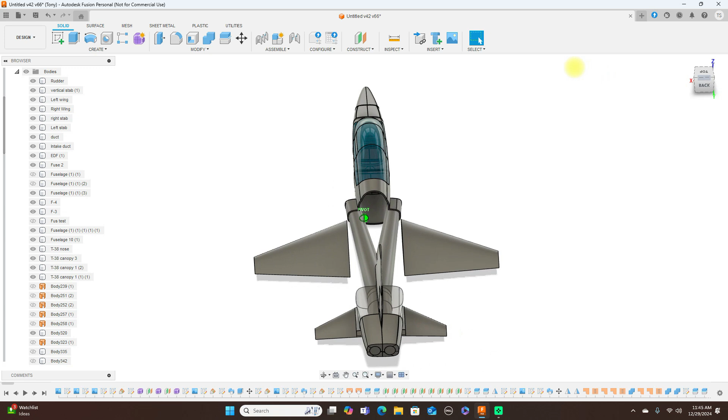I got a question about doing some ducting from one of my subscribers, so what I'm going to do is show you a couple of ways how to do ducting like this in this T-38 here. This is just one of the ways I did this.

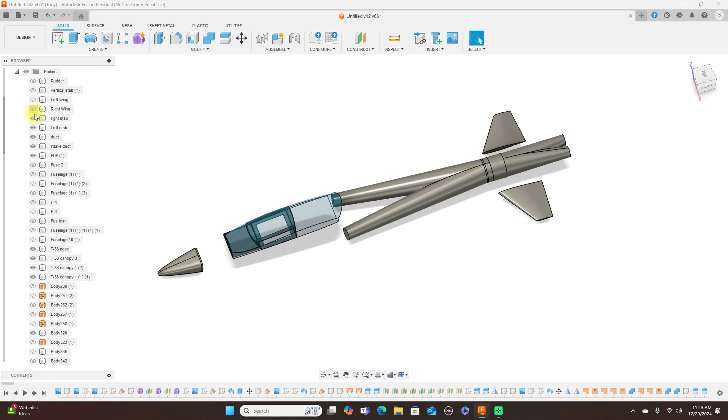Let's turn off some of this stuff so we can have a better look at it. Okay, we can turn off the wings too, all this other stuff, we don't need to be looking at that. Let's see here, the canopy, the nose. Okay, here we have just the ducts, the ducting, and the fan here. We don't need that either.

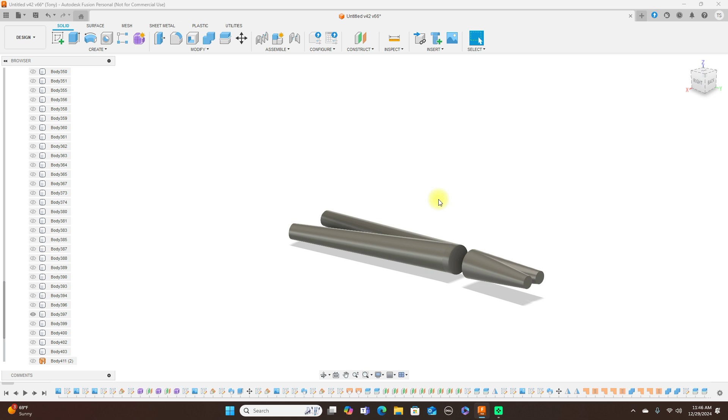Now to do this, to get these like this, so you have ducting like this, and we have all this here. I'm going to show you how to do this. This is not very difficult to do, but I'll show you how to do it.

Let's start a new project here. Now how I did that...

Let's just do a make-believe fuselage here. So let's do a little design. And another line.

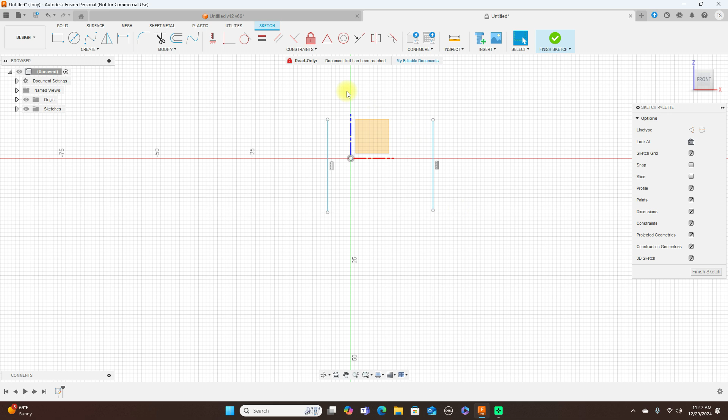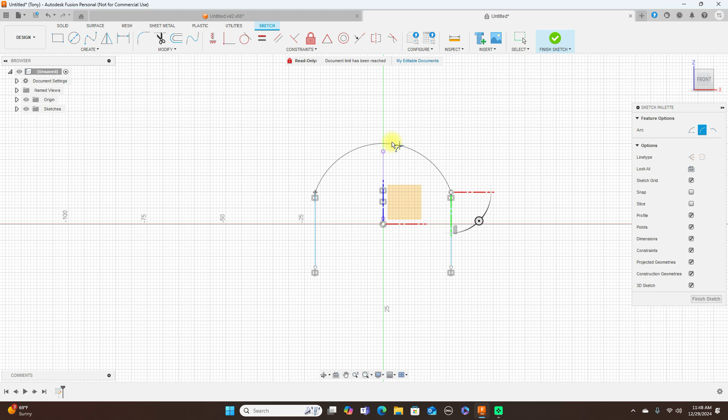Go ahead and delete this one here, and then mirror this line here. I'm going to use a 3-point arc on the top, and a 3-point arc on the bottom.

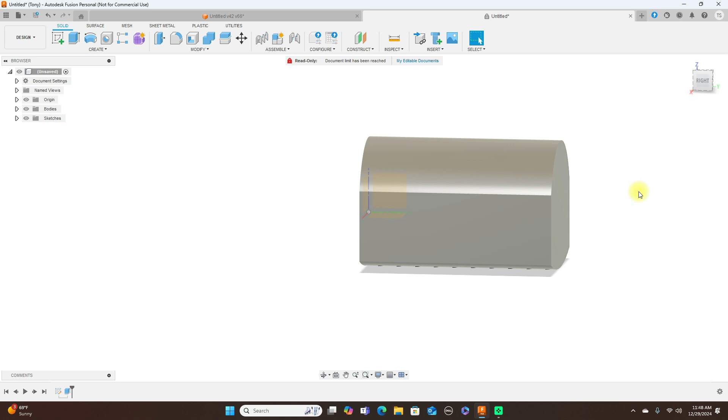Finish sketch here, then I'm going to extrude this. All right, there's our makeshift fuselage. Let's go ahead and make it a little longer though, so just come down here and edit this, stretch this out further, there, and click OK.

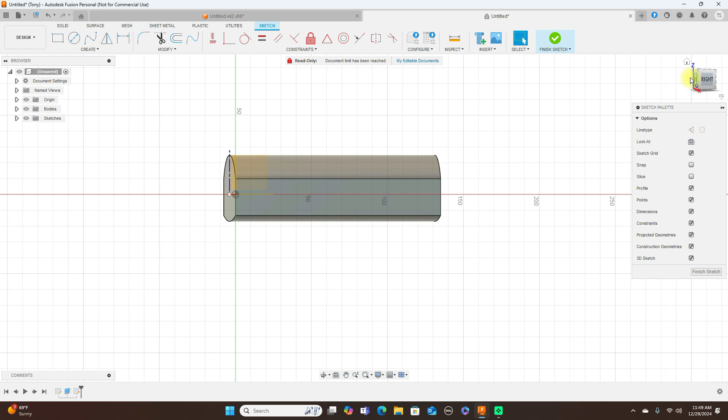And what I'm going to do here is split this in half, draw a line here. Well, before that, before I split that in half, let's say if we have an EDF fan unit that I want to put inside of here.

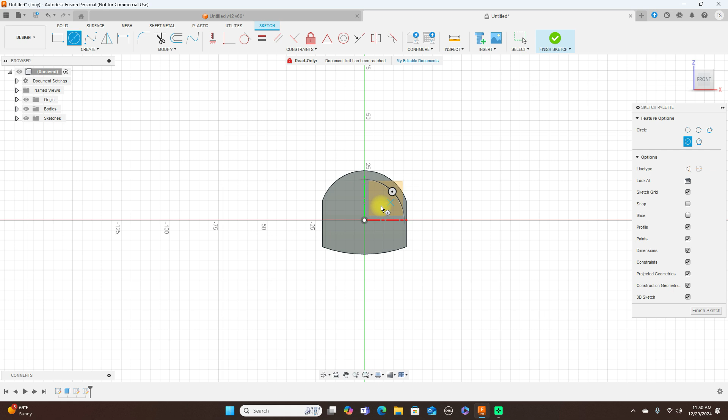So I'll create a sketch on this plane here, use a circle, and move this down a little like that. Unlock that so I can move it again if I want to. Now we have that there.

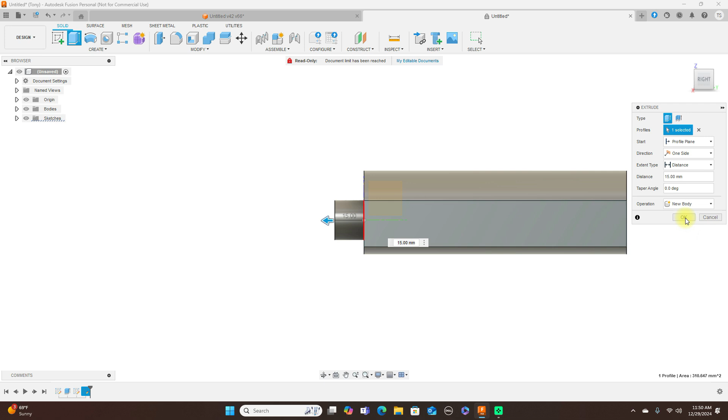What I'm going to do is finish sketch here, extrude this forward a little, let's say whatever size your EDF unit is, the shroud on the outside, and this is a new body. Click OK, now I'm going to move this back.

Come over here to the bodies, and this here. Well, first I'm going to take this one here and the opacity level, drop that down to 60. And then I'm going to move this back.

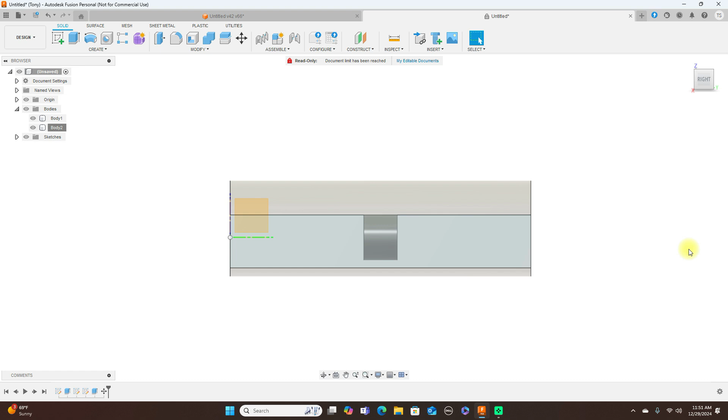Now, somebody even asked a question about whether they should design the duct first and then design the airplane, or vice versa. That's up to you how you want to do that. If you want to build the plane around the EDF, that's fine too - model your EDF unit in there first, then go ahead and model the airplane around it. But what I do, I like to model the airplane first, and while I'm doing that, I have the dimensions of the EDF unit that I'll be using, and I use those dimensions when modeling to make sure the EDF fits inside the jet itself.

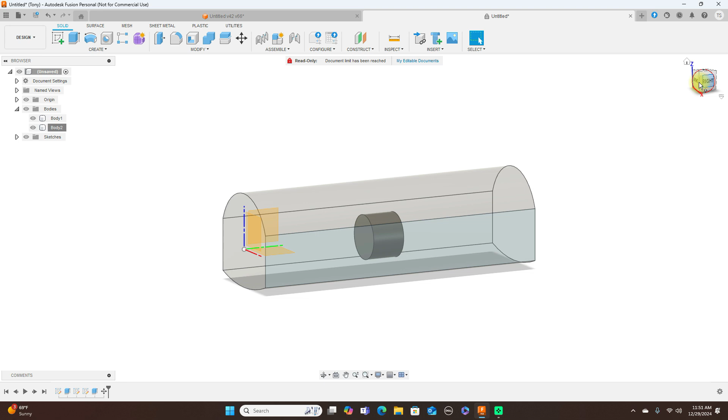So anyway, we have this here, now we have the EDF unit in here, and we want the intake ducting and exhaust ducting on here. Now what I'm going to do is turn this off here. I can leave it on, no biggie.

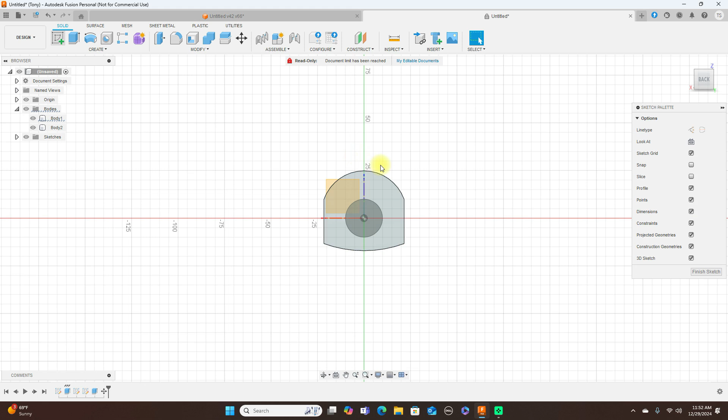And the split ducting, what I'm going to do here on this plane, create a sketch. Let's say you're using a 90 millimeter EDF fan unit and you want the exhaust - now you can keep it at 90 millimeter, but for thrust and everything, you can drop it down somewhere like 10%.

So 10% of 90 would be 9, and 90 minus 9 would be 81. So the back of this duct opening, I would have it between 81 and 83. If you have a split ducting at 81, let's just make it an even number - let's say 82. So if you want bifurcated ducting in the back, each one of the outlets should be 41 millimeters diameter, since it's 90. So what we do, I'm going to take this.

Now, this is not exact, because I didn't draw this to scale when I started, but just to let you know again, if you're using a 90 millimeter EDF fan, or let's say a 100 millimeter fan, then the ducting in the back, if bifurcated, 10% of that 100 would be 90, so each of the exhausts of the bifurcated ducting should be 45. But anyway, this is just showing you guys how to do this.

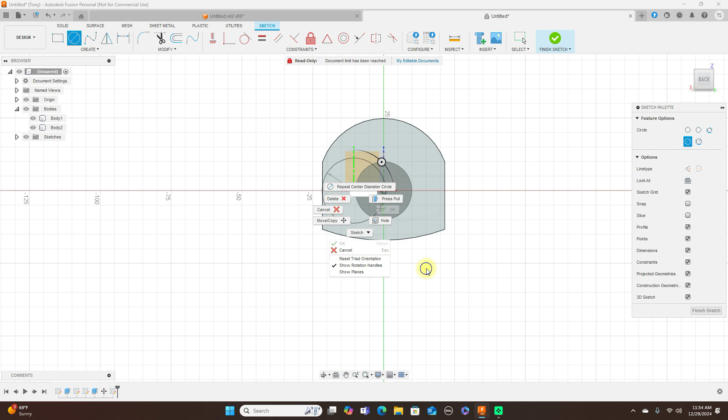Oops, it's too big. I'll cancel this. Do this again.

Okay, now I have that circle there. Just go ahead and move it a little closer, it doesn't have to be that far out there.

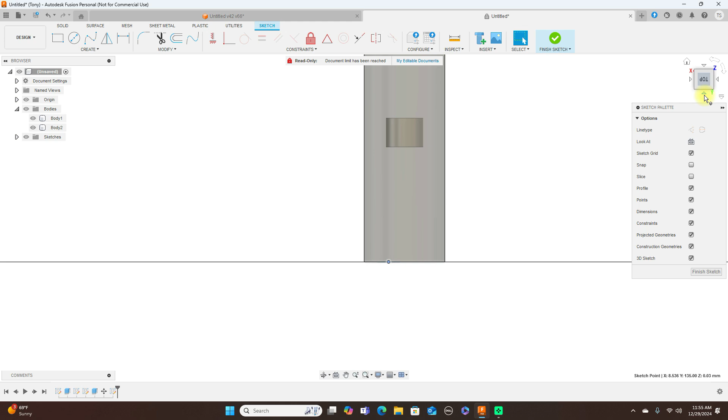Okay, now I can turn this body off here. Go ahead and finish sketch. Now what we're going to do is use a loft on this outer here, or make sure this is zeroed out before you start.

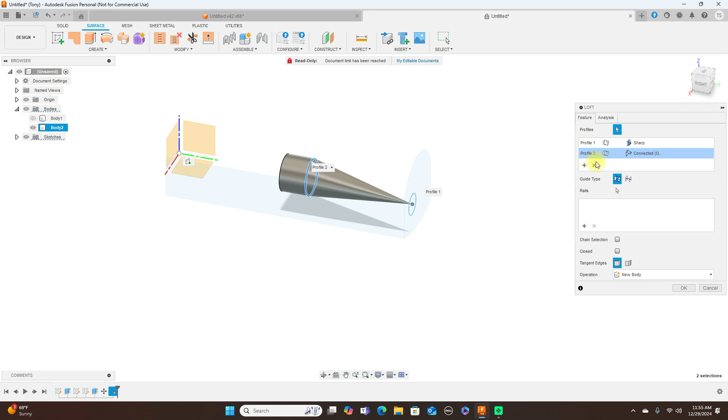And new body, and click OK. And you have that there. But what I'm going to do here is go back and delete this.

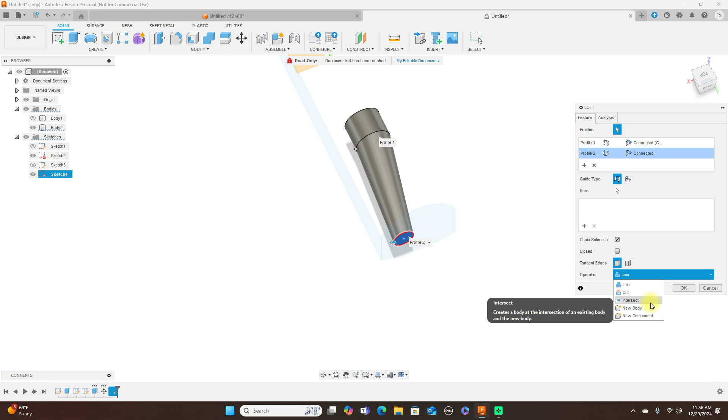And I'm going to use a solid loft. And make this a new body. Now it depends, it's up to you which one you want to use, but I want to use a solid for splitting purposes for when I do the other one of these.

Now we have that one there, and now what I'm going to do is use a mirror. Mirror this, and this is the plane. And we want to join this. I'll go ahead and join this. And click OK. And now you have your exhaust duct there.

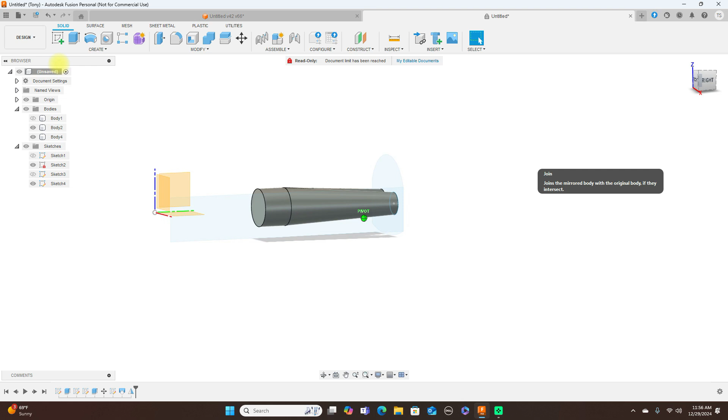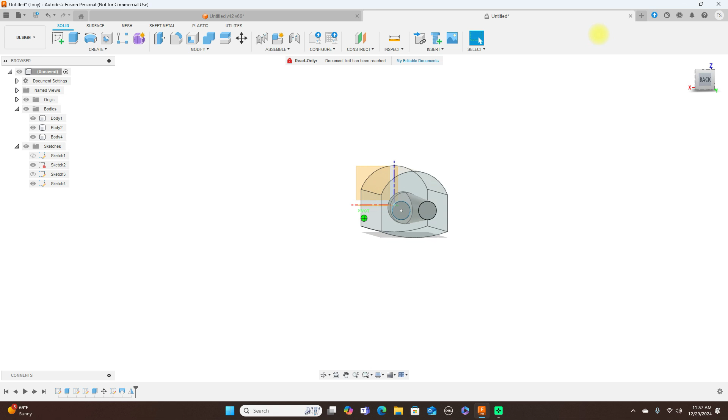Okay, and we turn this body back on here. And now we have our internal ducting there. And the front is done the same way.

So, say, create a sketch on this plane here. Circle. And whatever your intake is here - so if you have a 90 millimeter EDF unit and you have two intakes coming in, the ducting should be a minimum of each one of these, a minimum of 45 millimeters. Like I said, if that intake is 90 millimeter, the minimum intake on the EDF is 90 millimeter, or if it's 100 millimeter.

If it's 100 millimeter, then each one of these ducts up front should be minimum 50 millimeters for 100, and 45 for a 90 millimeter, and 40 for an 80 millimeter. That should be the minimum. But the more air that you can get in there, the better.

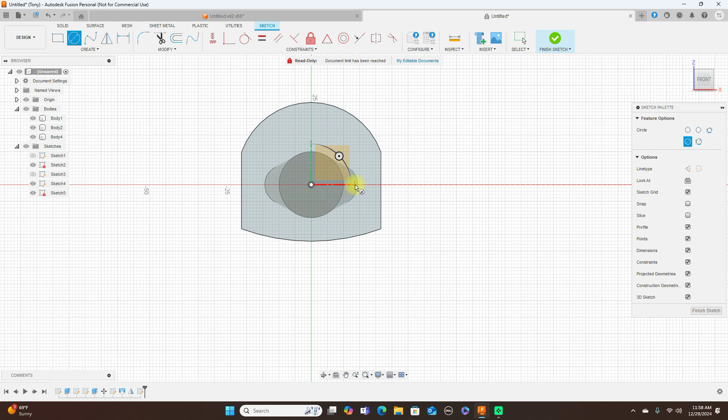And so let's just go ahead and put this over here. Like I said, this is not to scale as far as the diameter because I didn't start it like that. Okay, we can turn this body off.

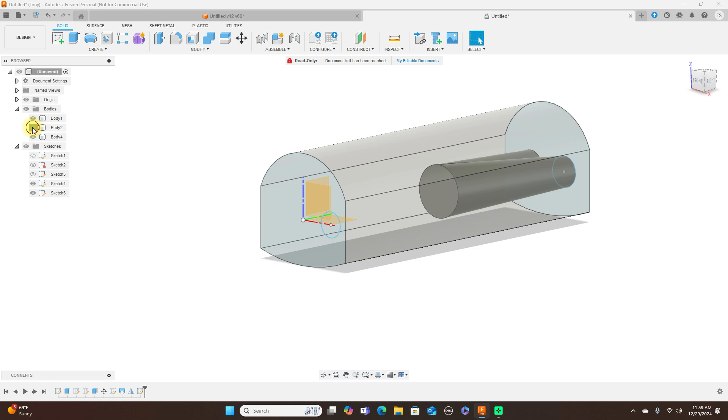Oops, go. That's that, that's that, and that's that. And again, we're going to loft. Oops, loft. Make sure this is zeroed out.

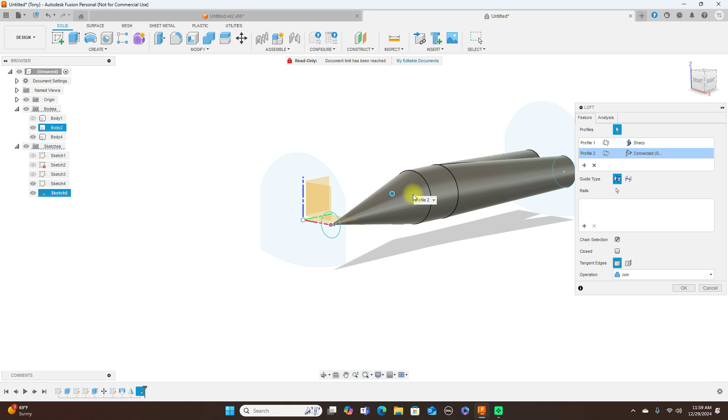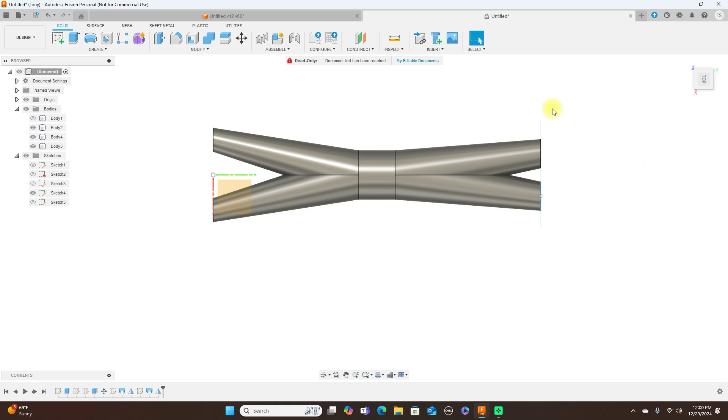And it did that point again, no worries. And make this a new body and click OK. And again, just mirror this. Like I said, this is just one way of doing this. And there you have your internal ducting for this.

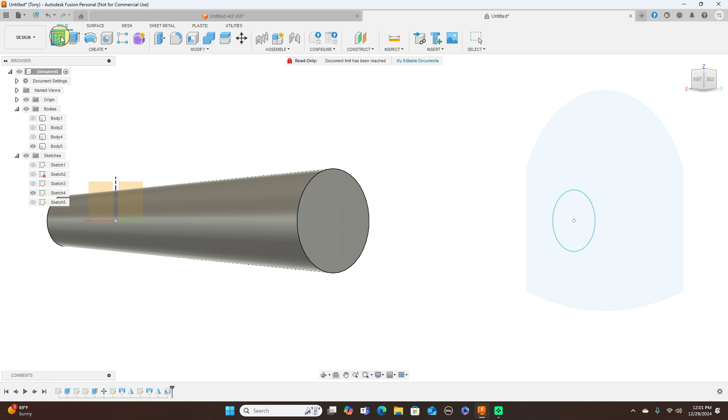And turn this off and turn this one off. And what I'm going to do now, create a sketch on this plane. Offset - and this offset is going to be whatever thickness you want your duct to be. And I'm just going to extrude this, cut.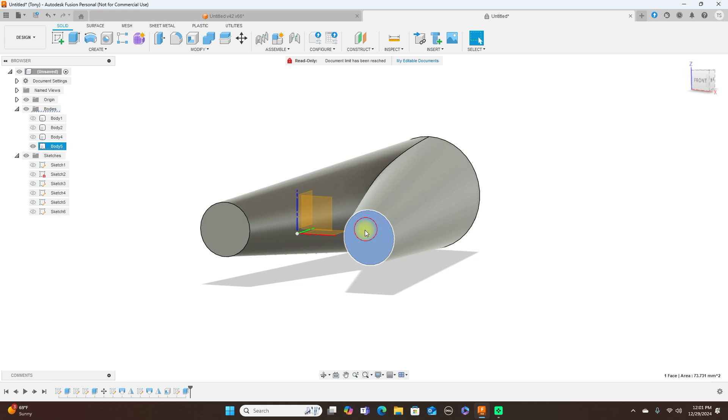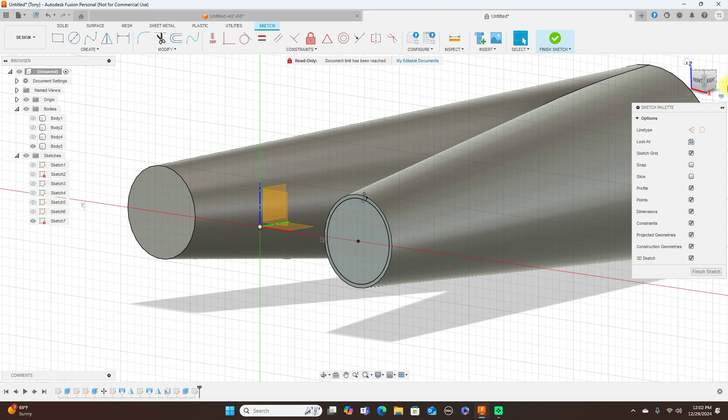Same with this. Create a sketch on this plane here. Do an offset, this. And it just mirrored that circle. Click OK. Finish sketch.

And we're going to extrude those two and bring that in. And we have our duct.

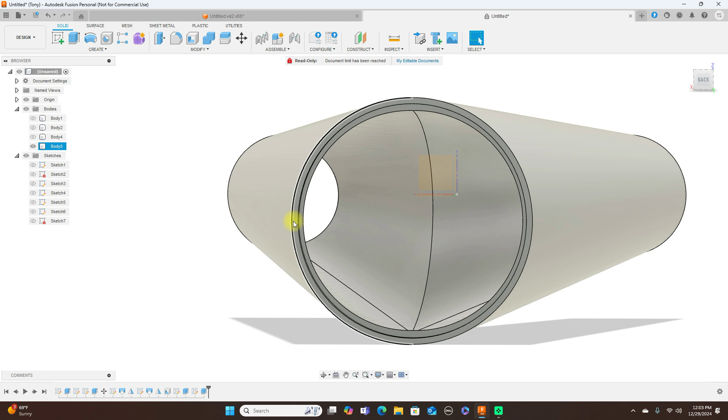Just make sure the circles that you sketch are from here to here, whatever thickness your ducting you want it to be - just move that into here when you sketch it. And the reason I did it this way, instead of using the surface loft, this loft, is it's less cutting. I can just combine the two like this, like I did.

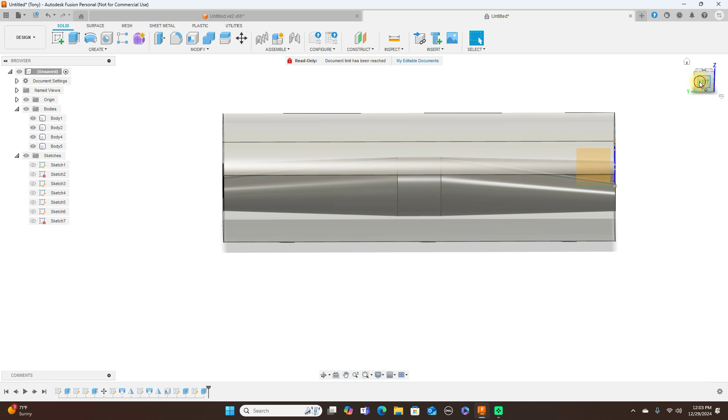So we have the back there. I turn this off, and turn this one off too.

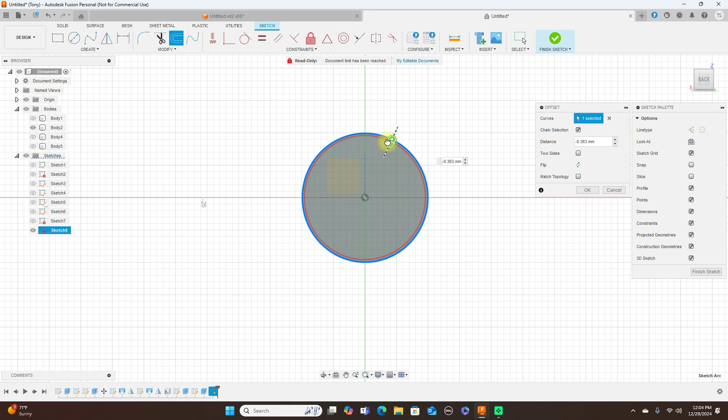And we can create a sketch on this plane here. Offset this. Extrude. And as you see, we have our ducting there.

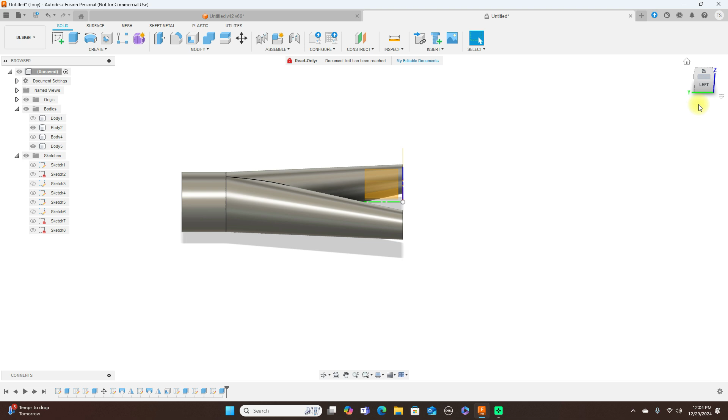Now this is just one way of doing this. Let's look at another way of doing this. If you're using Fusion to do this like I'm using right now, you can come up here to create form, and you can actually just use a cylinder.

And specify a center point - let's just say it's here. Then whatever length you want it needed to be. Add height faces.

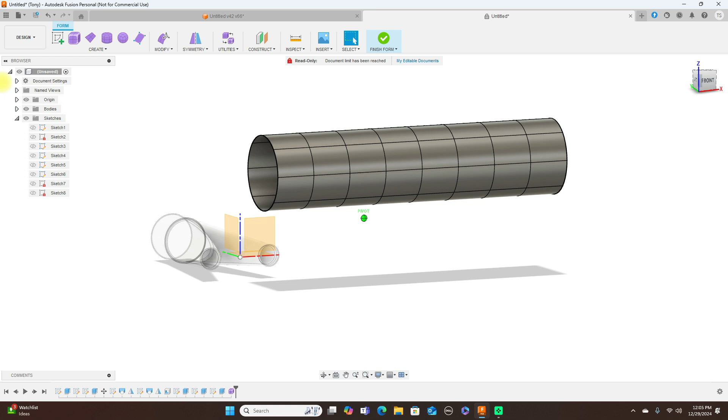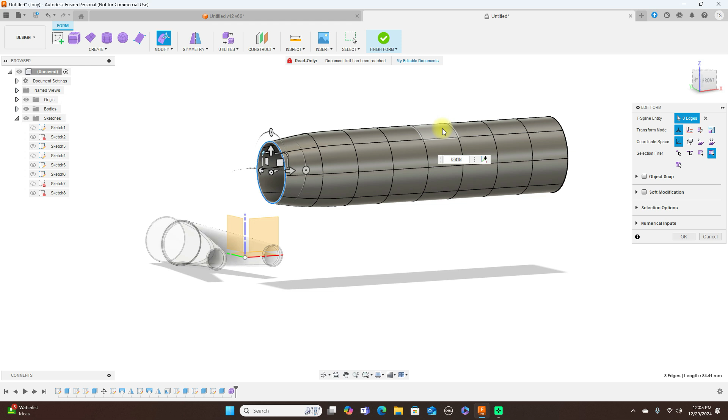Then you can edit all this stuff in here to get it to the size that you need it to be. So if we come out the front here, you take this and move this in, and everything. Again, if you need to move it to wherever, however you need it to be, then you can do that.

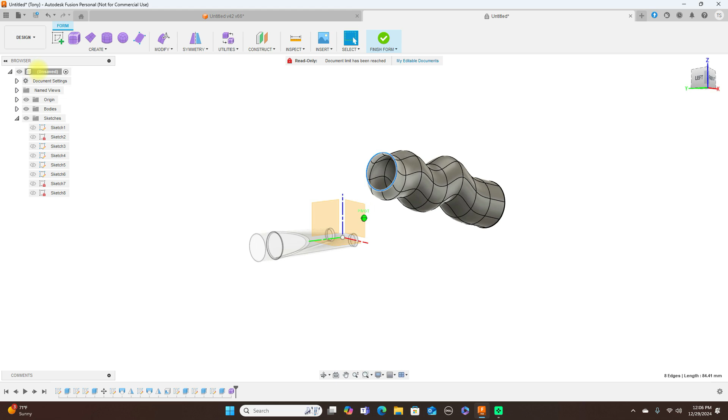So let's say this here, and you can stretch it around too and stuff. So again, that's just if you're using Fusion for this, then you can do that by using the form and make your duct like that.

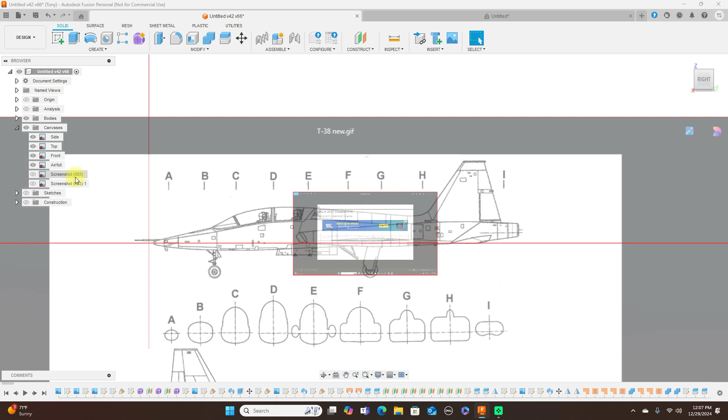And for surface modeling, turn this off too. Say like, let's see here, go back to this. Turn these off. And turn this little piece off here. Okay. Now turn the canvases on here. Turn the airfoil off here. Okay.

Now, to do the ducting for this is one way of doing this. I'll show you here. We're going to put an offset plane and move it back to wherever the ducting you want it to start at. I'm just going to put it right here for demonstration purposes, and click OK.

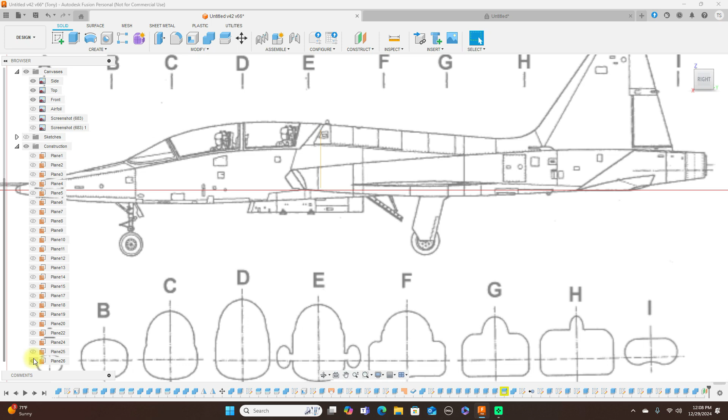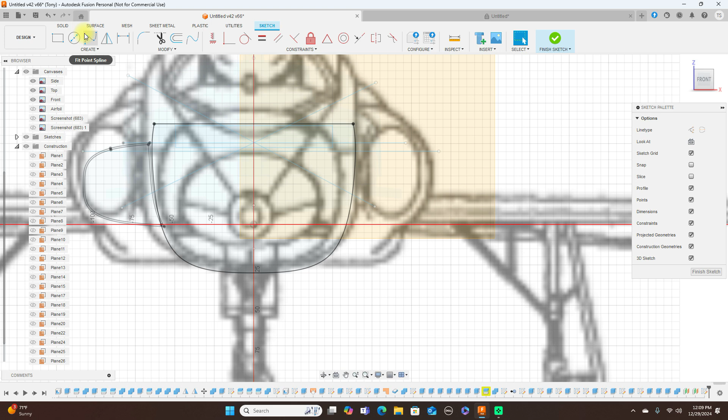Okay, and I'm going to put another plane to where the EDF is going to start. Let's say it's going to start right here. Okay, we have our two planes there. First, going to create a sketch on this plane here, and I'm going to use fit point spline.

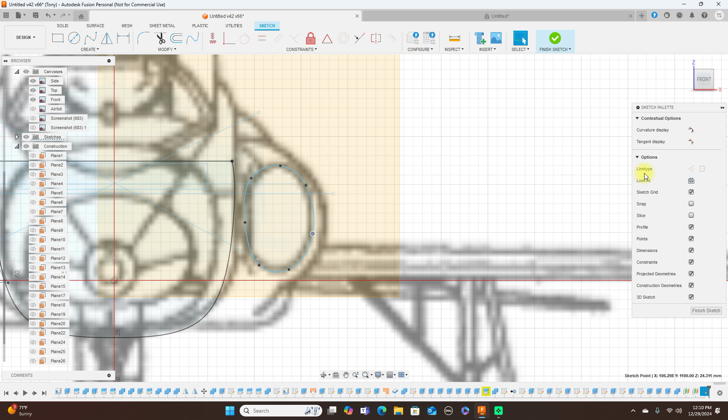Okay, whatever shape you want this to be, I'm just following this around here. And go ahead and finish sketch.

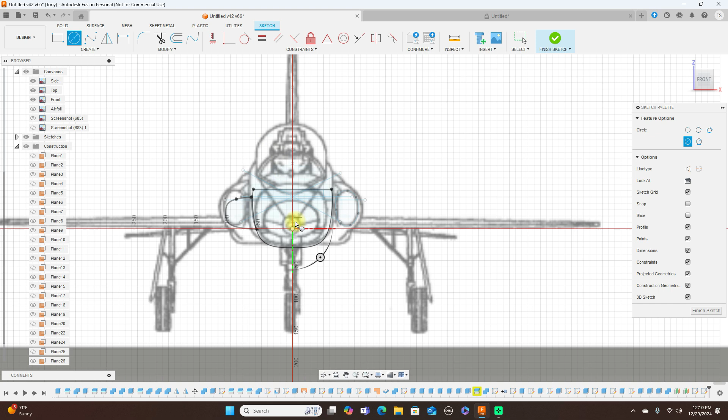Now, I'm going to create a sketch on this plane here, this one. And wherever I want my EDF in the center to be, so I want it here or somewhere. And I want the outside diameter to be 90 millimeters. And go ahead and finish sketch.

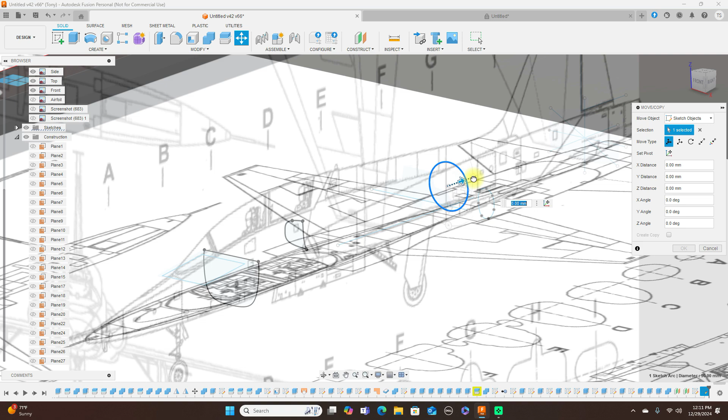Turn sketches back on. But let's see here, I want to move this back. I drew it on the same plane. And say about right there. Click OK.

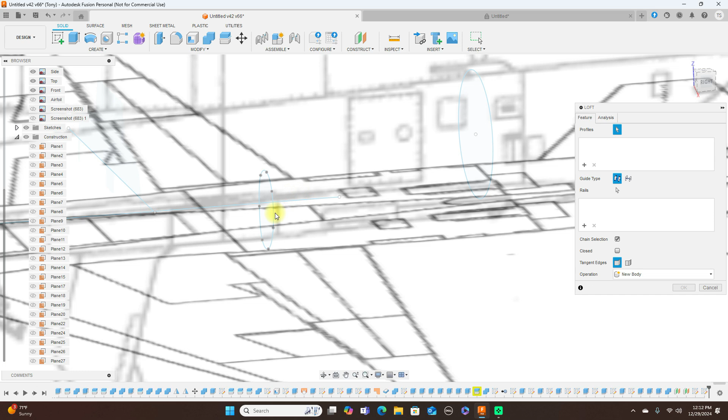And same thing, we come up here to loft. Loft this. Pick that point again. We have that. But I went to the wrong point here, sorry about that. Let's go ahead and go back.

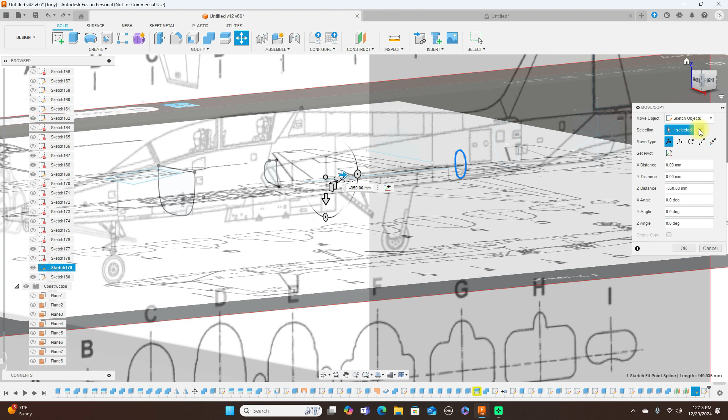And turn on that last sketch. Or I put that at the wrong place too, on the wrong plane. But no worries, so just move it. And move this up front here. I don't know why that won't move, but no worries, I'll just do that sketch again.

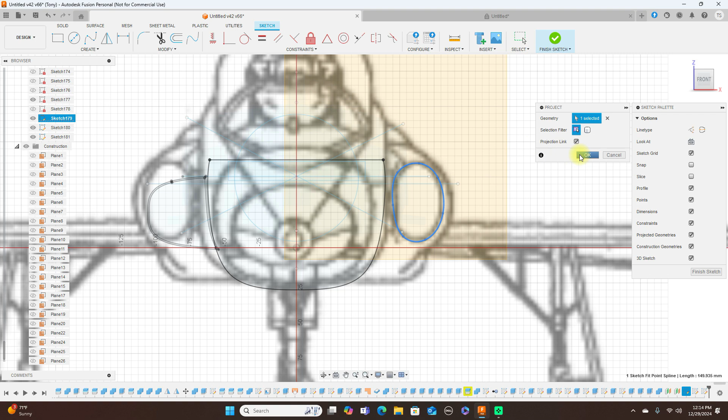So on this plane here, create a sketch. Well, actually, I don't have to cancel that. Hit project that onto it, and finish sketch. Now we have that up front, and we loft that again. And click OK.

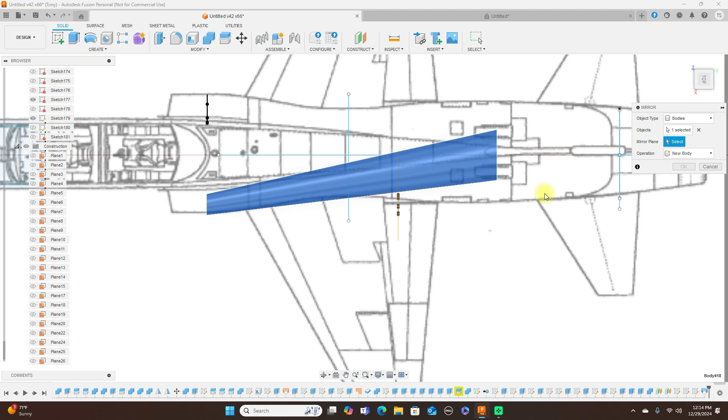Now we have that in there. Then we just mirror this. And there we have our duct. And the back one's done the exact same way.

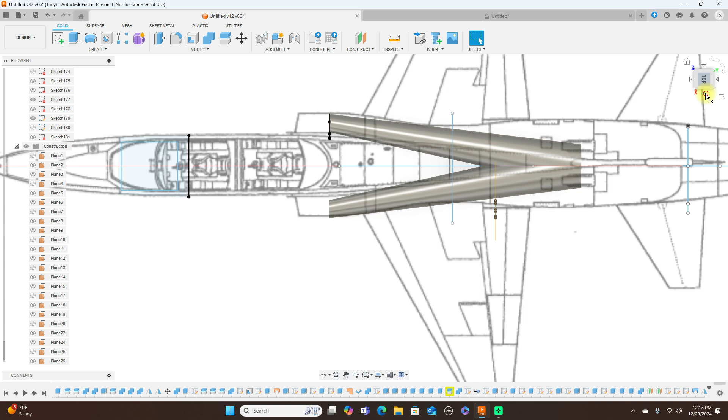Now, other ways of doing this, let's take a look. Go ahead and delete this, we don't need it. We have this here. And we can cut this duct out of this, or make this hollow and have the duct inside of it. So let's go ahead and do that.

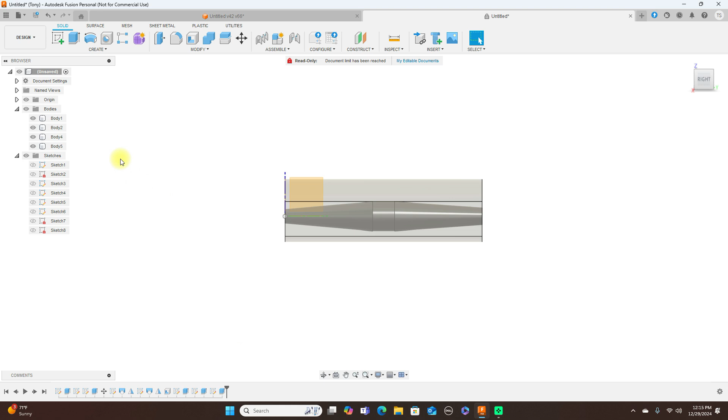So first, let's go ahead and just cut the ducting out of here. So this body here, and turn the opacity, I can leave it like it is. So we come up here to combine. This is a target body, and these are the tool bodies. And select Keep Tools, and click OK.

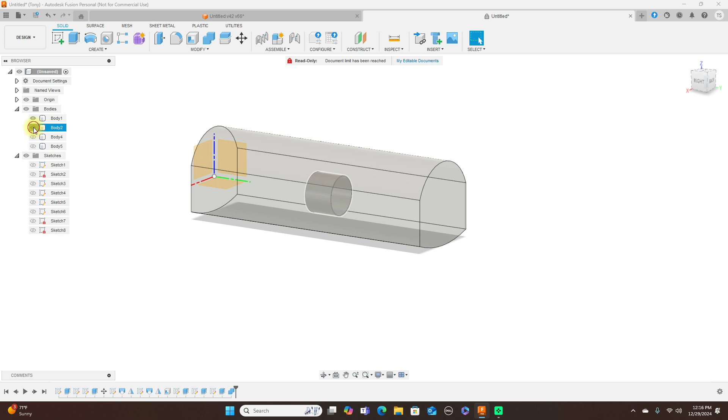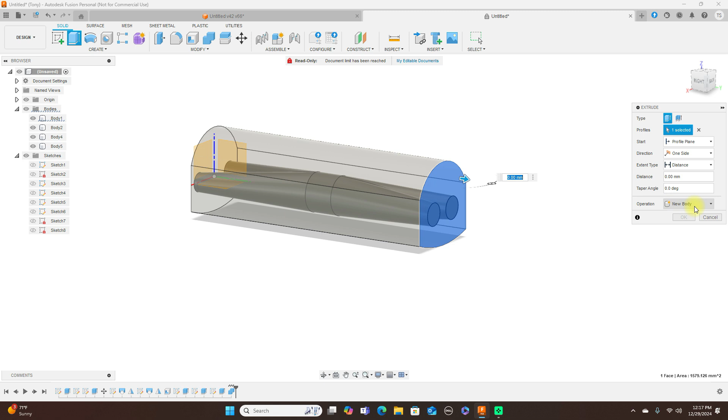Now turn off these ducting. Now, like I thought, it didn't go all the way through here on the ends, which is no problem. Let's cancel this and bring the opacity back up here. Show you what I exactly mean here. So if I turn all these off, then I come up here to inspect section analysis. This is not all the way through here, like I thought.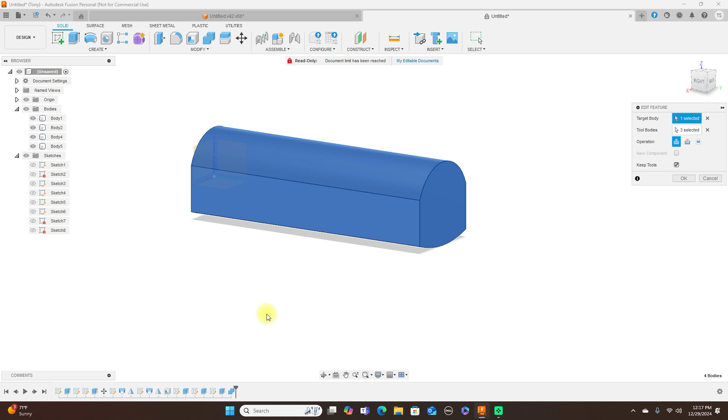So we turn these back on. And the reason that it didn't cut in there, you're probably wondering, is because, I'll show you here. Edit, see this right here? I had this to join, need to move this to cut. Okay.

Now turn off these, and now you can see that cut inside there. Inspect this, section analysis, and now you can see that cut in there.

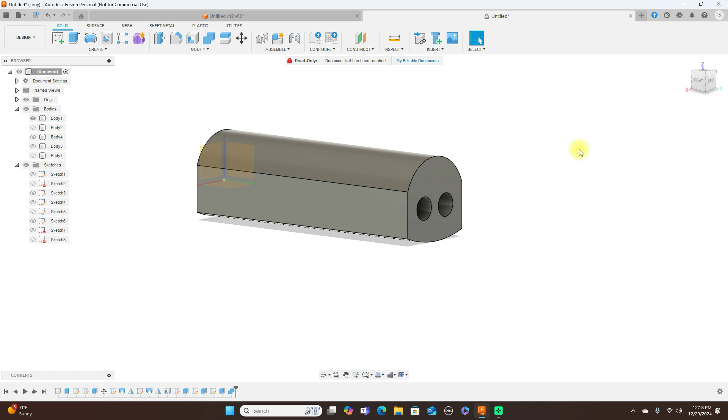Okay, now that's one, cutting it in there like that. Now, if you 3D print this, you would not use any infill if you needed this duct inside of here when you're 3D printing it.

But if you want to put it in here, the duct itself, then what you can do is just, when you're going to 3D print this, just print this with zero infill, and this duct will be inside of here.

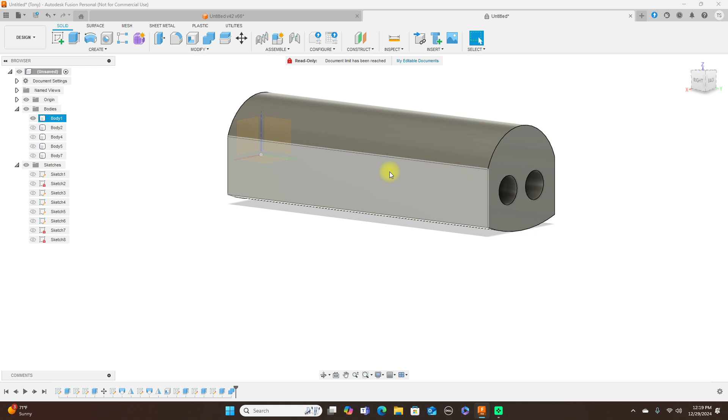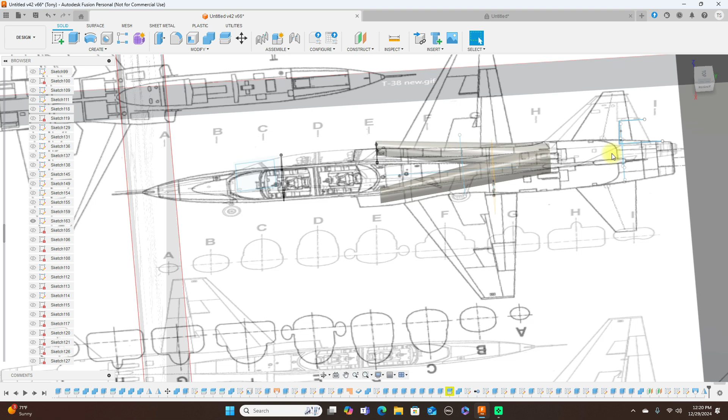All right. What else can I talk about ducting here? So we talked about the lofting with the surface modeling of it by drawing the actual shapes of it, then lofting to the next one. I showed you guys how to use the forms with it and how to cut stuff out of the fuselage and everything. So that's pretty much it for ducting. I don't know what else to show you guys here. I showed you guys how to do this here, and the back one's done the exact same way. And how to cut this out.

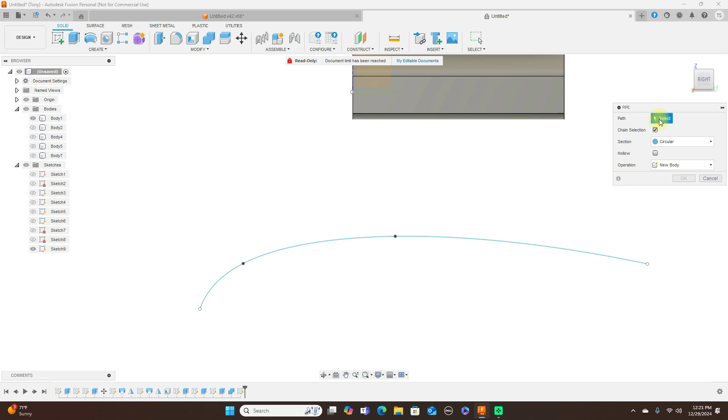Oh, there's just one other thing. Yeah, okay, this popped in my mind. So another way you can do this, let's just create a sketch on this plane here. And use a fit point spline. And so your duct has to be something strange, let's just say something like this. Finish sketch. Now you can use the pipe command. That's your path there. Now, whatever thickness you need your pipe or the duct itself to be, let's just say 40 millimeters. And click OK.

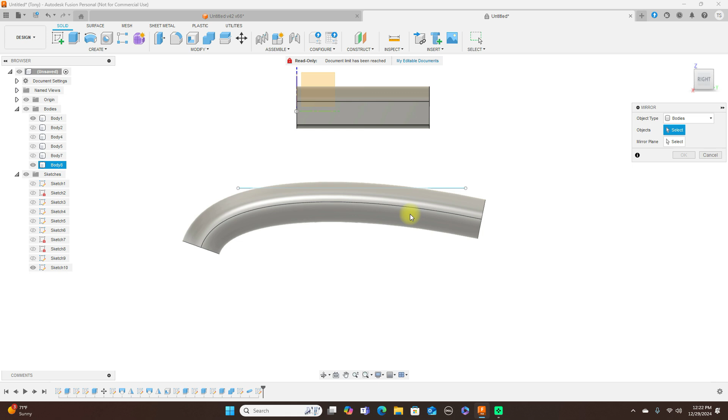So, again, there's another way of doing that. And let's put a line right here. So, create a sketch on this plane here. Okay, finish sketch. Now I'm going to mirror this. Use this as the mirror line that I just put here. Okay, it's got to be a plane, no problem. What we do here is construct and use plane at an angle. Select this. Keep this at 90 degrees.

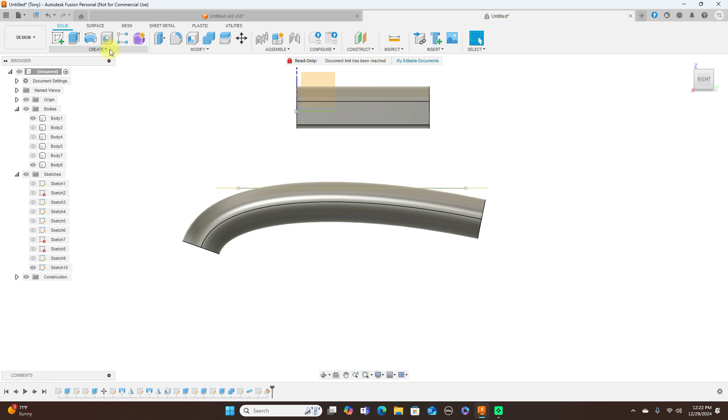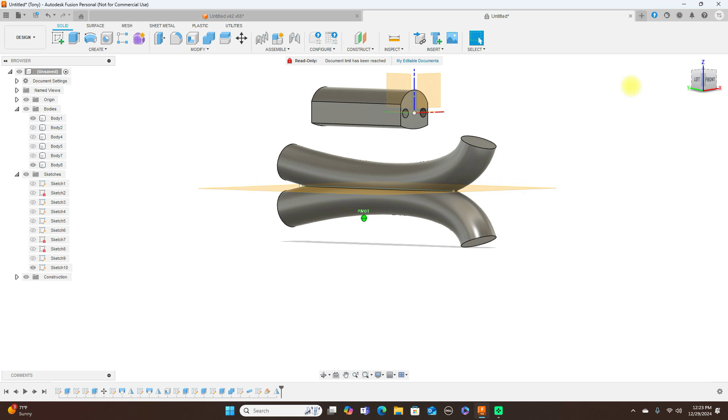Select OK. Now, come over here to create, mirror. This is what we want to mirror, and select the plane is this, and join. Click OK. Now we have those two, and I want to join them closer. Okay, just say we have something like that. That's another way of doing this: ducting by using a spline and then using the pipe command.

Yeah. But anyway, that's going to do it for this video. Just wanted to show you guys a few ways of how to do the ducting inside. So one way we did the drawing the shapes and then lofting. The other way I used the create form here. Another way I used a pipe command of doing that also. So yeah, that is going to do it for this video.

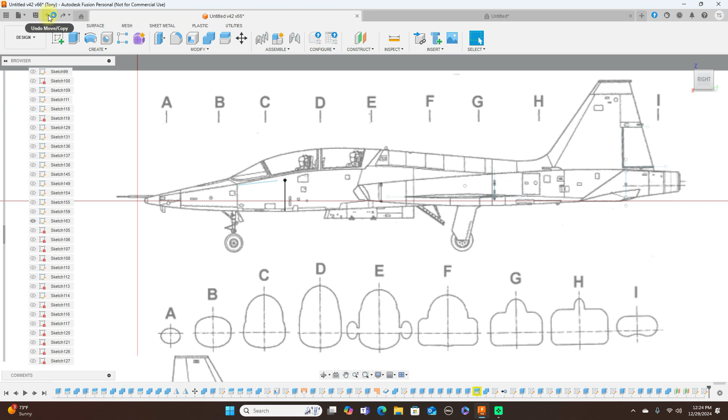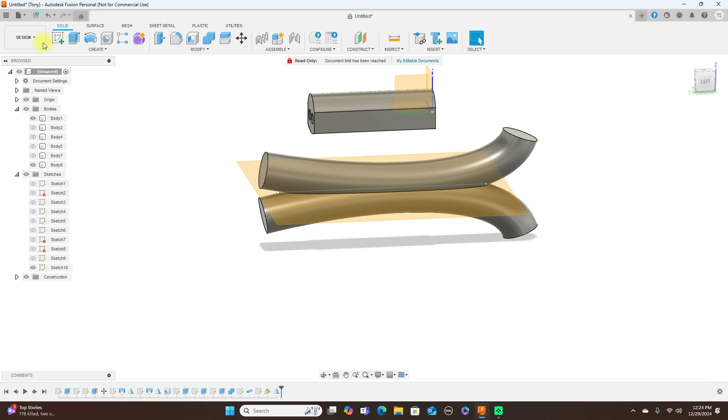And some of you guys are probably thinking about this T38 that I did here. I've been working on this T38. I showed you guys how to model a T38, and I had a larger T38 also that I 3D printed, but I really hadn't done much work to that. And this one, it's a little smaller, and let me just go ahead and close this here. Don't save. And open it again. Oops.

Okay, this T38 here that I've been working on. I showed you how to do the internal ducting and stuff like this. But this one here is smaller, takes a 90 millimeter EDF fan, and I just have a couple more sections to work on, getting the structure inside and everything.